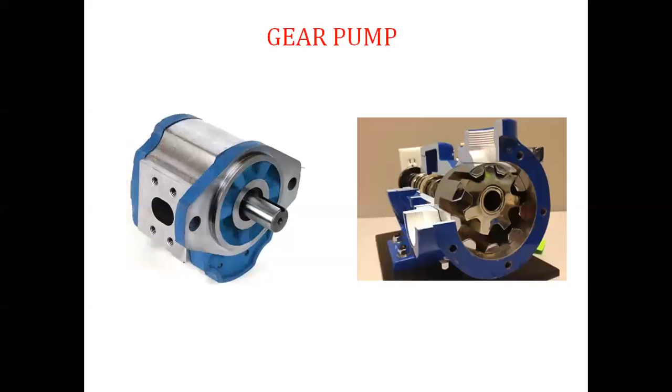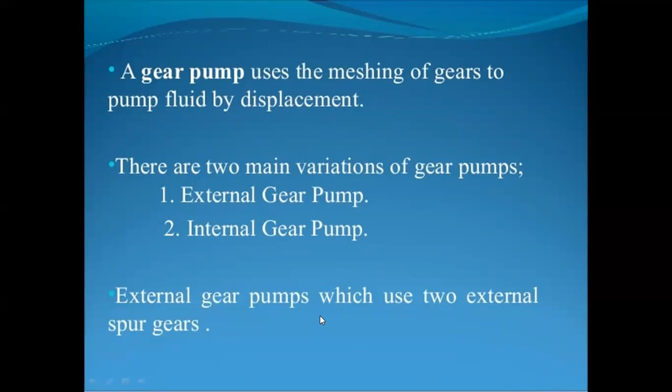A gear pump uses the meshing of gears to pump fluid by displacement. There are two main variations of gear pump: external gear pump and internal gear pump. External gear pumps use two external spur gears. Internal gear pumps use external and internal spur gears.

Gear pumps are positive displacement or fixed displacement, meaning they pump a constant amount of fluid for each revolution. Some gear pumps are designed to function as either a motor or a pump.

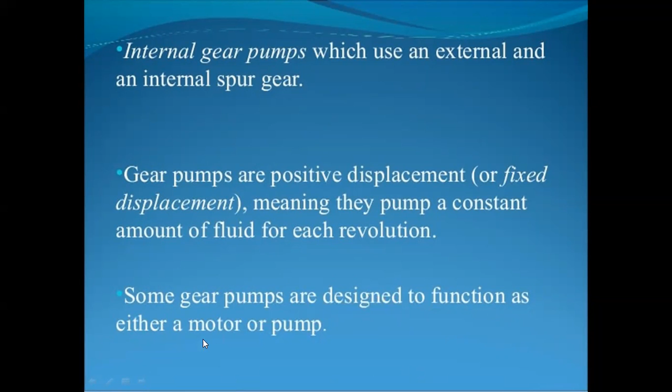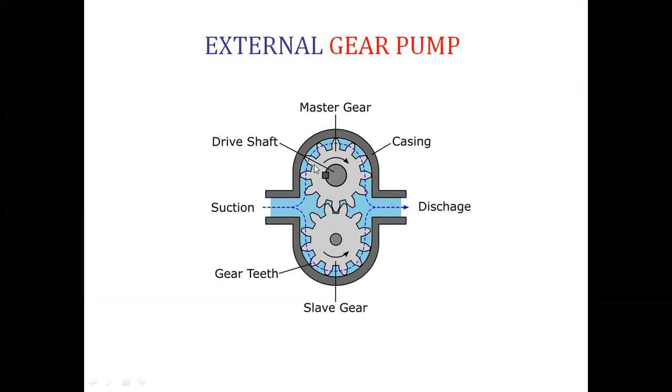External gear pump: master gear, drive shaft, casing, suction, discharge, gear teeth, slave gear. See, this is an external gear pump. Here, two gears are used, external gears. This is the inlet of the liquid and this is the outlet of the liquid. Here, this master gear rotates and drives this gear, like that, in the clockwise direction. This one rotates in the anti-clockwise direction.

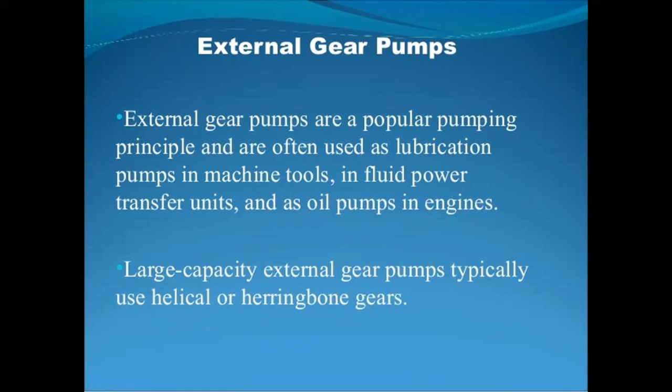External gear pumps are a popular pumping principle and are often used as lubrication pumps in machine tools, in fluid power transfer units, and as oil pumps in engines. Large capacity external gear pumps typically use helical or herringbone gears. Small external gear pumps usually operate at 1750 or 3450 RPM, and larger models operate at speeds up to 640 RPM.

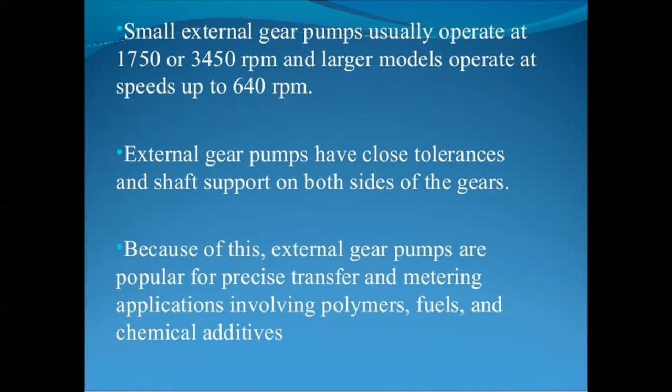External gear pumps have close tolerances and shaft support on both sides of the gears. Because of this, external gear pumps are popular for precise transfer and metering applications involving polymers, fuels, and chemical additives. External gear pumps are similar in pumping action to internal gear pumps, in that two gears come into and out of mesh to produce flow. The external gear pump uses two identical gears rotating against each other.

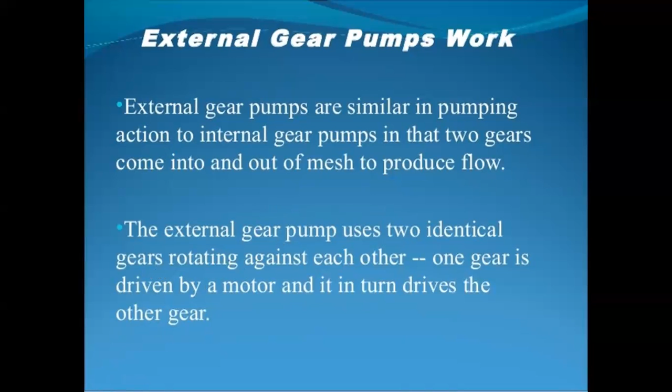One gear is driven by a motor and it in turn drives the other gear. Liquid flows into the cavity and is trapped by the gear teeth as they rotate. Liquid travels around the interior of the casing in the pockets between the teeth and the casing. Finally, the gears force liquid through the outlet port under pressure.

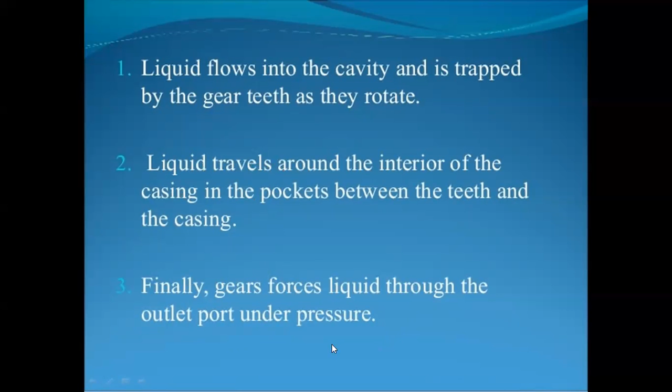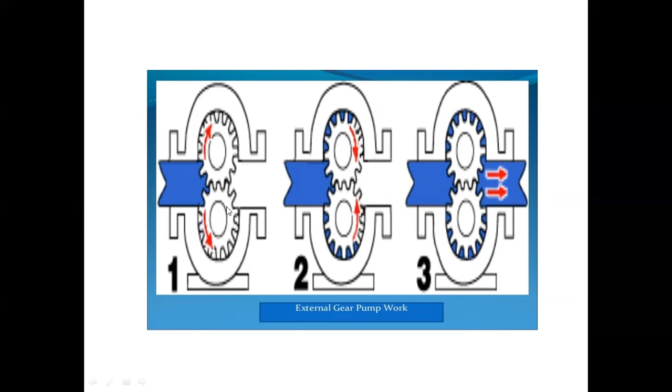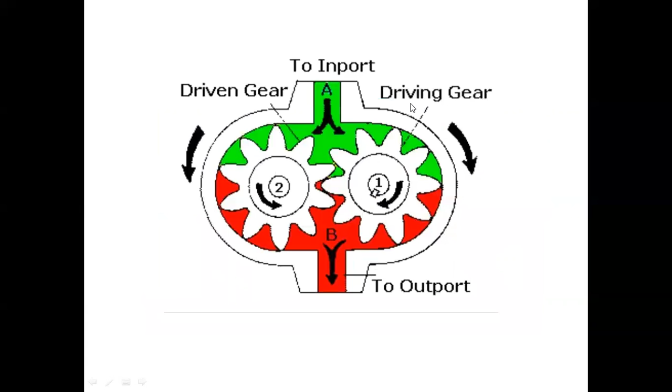See, external gear pump: here the liquid inlets like that. This is a gear. This is the second gear. This is the third gear pump. First gear pump, second gear pump, third gear pump. A gear pair is used here. So liquid inlets from here and outlets from here of the first gear pump. See, input. This is the gear and the outlet of the liquid. This is pressurized liquid. Driven gear.

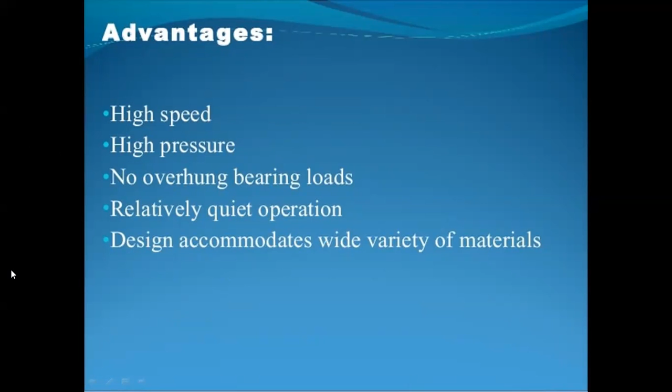Advantages: high speed, high pressure, no overhung bearing load, relatively quiet operation, design accommodates a wide variety of materials. Disadvantages: four bushings in liquid area, no solids allowed, fixed end clearances.

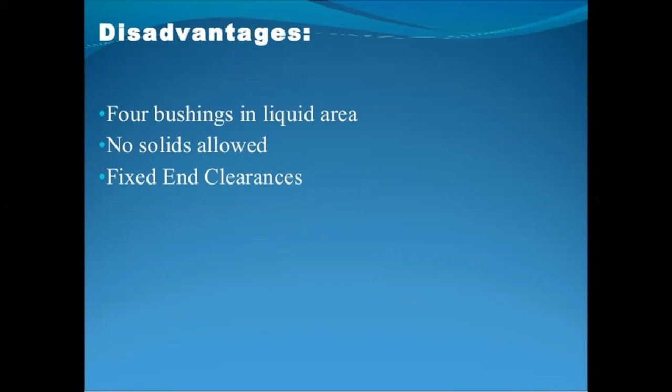Common external gear pump applications include but are not limited to various fuel oils and lube oils, chemical additives and polymer metering, chemical mixing and blending, industrial and mobile hydraulic applications, acids and caustics, and low volume transfer applications. These are the applications.

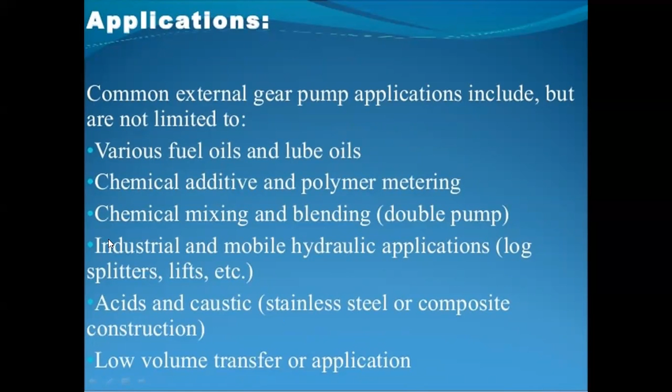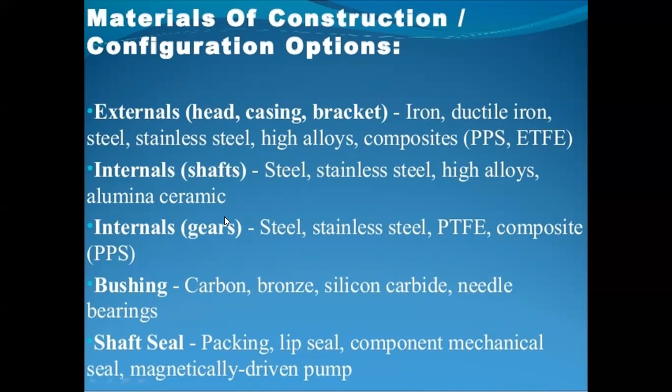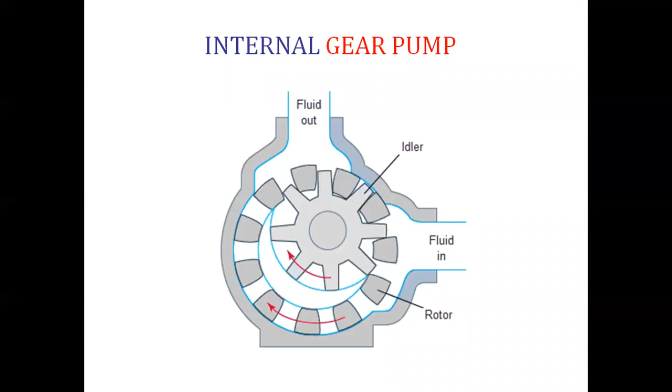Internal gear pumps are exceptionally versatile. While they are often used on thin liquids such as solvents and fuel oil, they excel at efficiently pumping thick liquids such as asphalt, chocolate, and adhesives. The useful viscosity range of an internal gear pump is from 1 cP to over 1,000,000 cP. Centipoise.

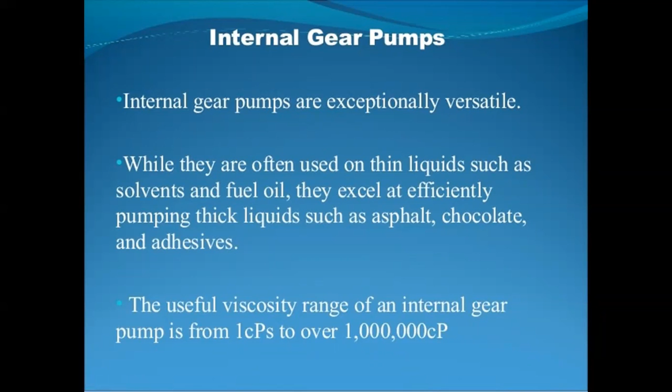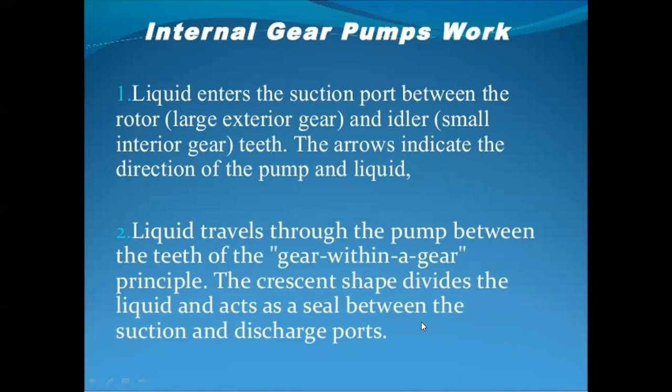Liquid enters the suction port between the rotor and idler. Small interior gear teeth. The arrows indicate the direction of pump and liquid. Liquid travels through the pump between the teeth of the gear-within-a-gear principle. The crescent shape divides the liquid and acts as a seal between the suction and discharge ports. The pump head is now nearly flooded just prior to forcing the liquid out of the discharge port.

Intermeshing gears of the idler and rotor form locked pockets for the liquid, which assures volume control. Rotor and idler teeth mesh completely to form a seal equidistant from the discharge and suction ports. This seal forces the liquid out of the discharge port.

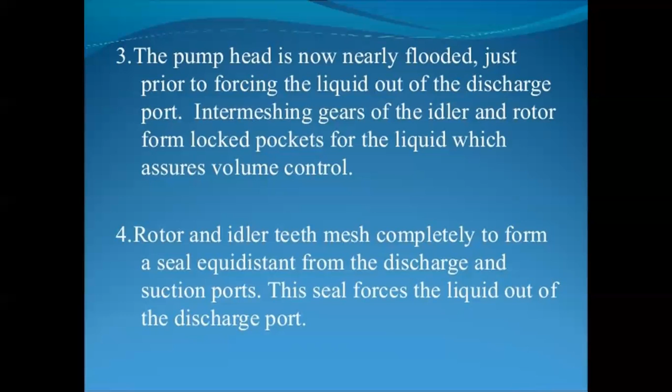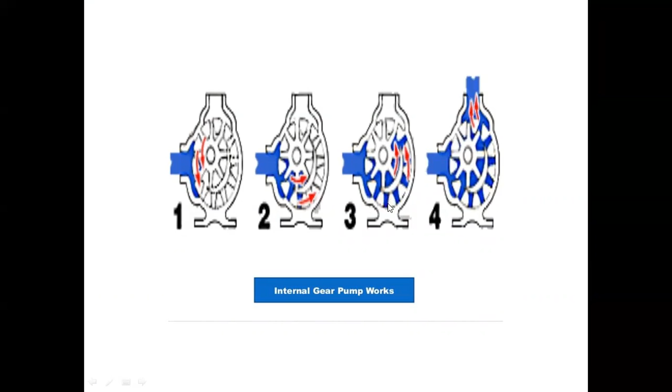Internal gear pump works, see, like that. First, liquid enters. Here, liquid enters like that. After that, this is the complete outlet of the liquid. So inner gear, see, like that.

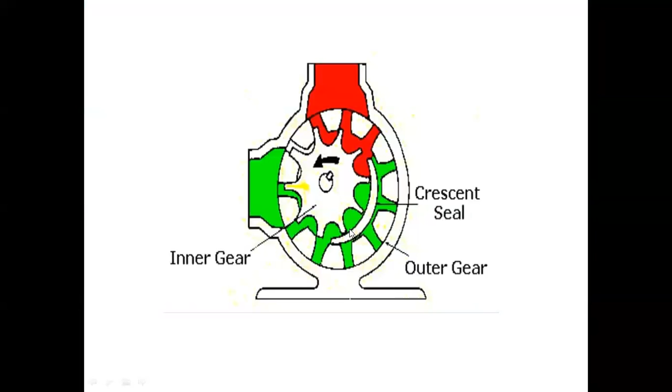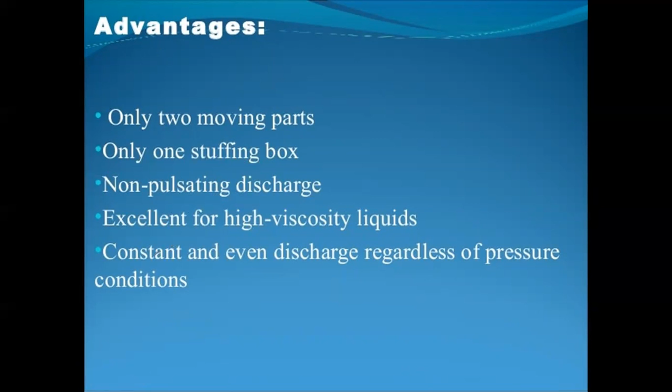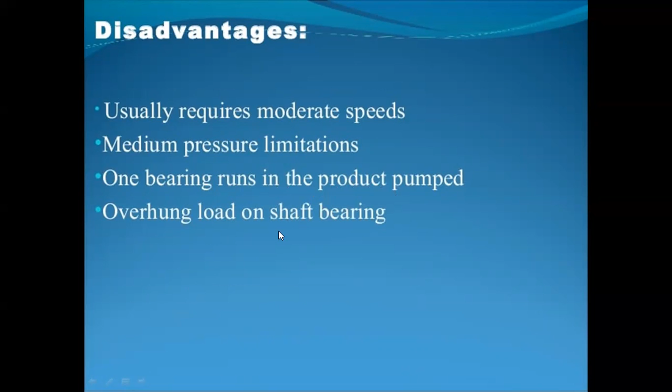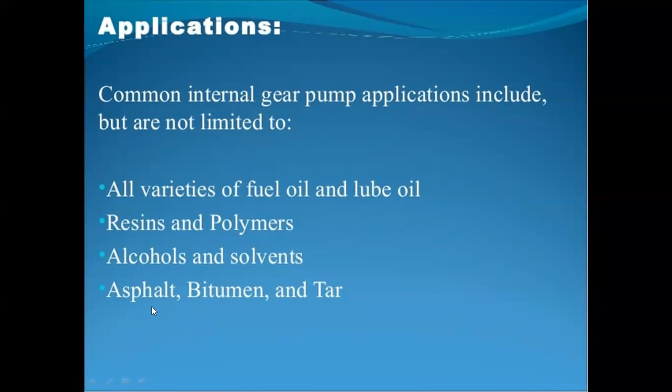Disadvantages of internal gear pump: usually requires moderate speed, medium pressure limitations, one bearing runs in the product pumped, overhung load on the shaft bearing. Common internal gear pump applications include but are not limited to all varieties of fuel oil and lube oil, resins and polymers, alcohols and solvents, asphalt, bitumen, and tar.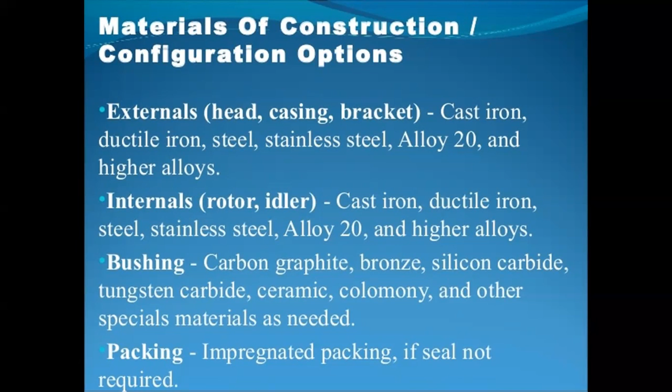Material of construction and configuration options. External head, casing and bracket: cast iron, ductile iron, steel, stainless steel, alloy 20, and higher alloys. Internals, rotor and idler: cast iron, ductile iron, steel, stainless steel, alloy 20 and higher alloys. Bushing: carbon graphite, bronze, silicon carbide, tungsten carbide, ceramic, and other special materials as needed. Packing: impregnated packing if seal not required.

Gear pumps are generally used for petrochemicals: pure or filled bitumen, pitch, diesel oil, crude oil, lube oil. In petrochemicals, we use our gear pump. Chemicals: sodium silicate, acids, plastics, mixed chemicals, isocyanates, paint and ink, resins, adhesives, pulp and paper, acid, soap, black liquor.

Lime, latex, sludge, food, chocolate, cocoa, cocoa butter, sugars, vegetable fats and oils, animal food.

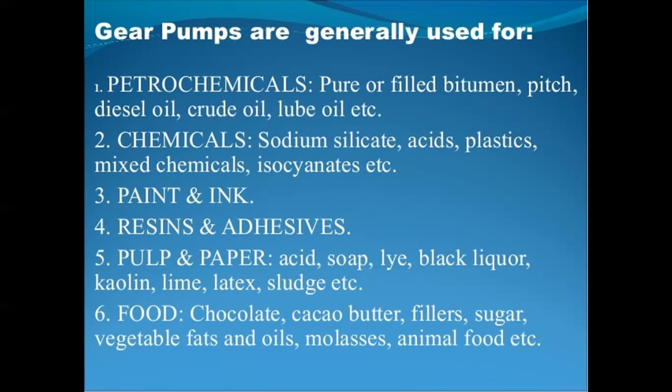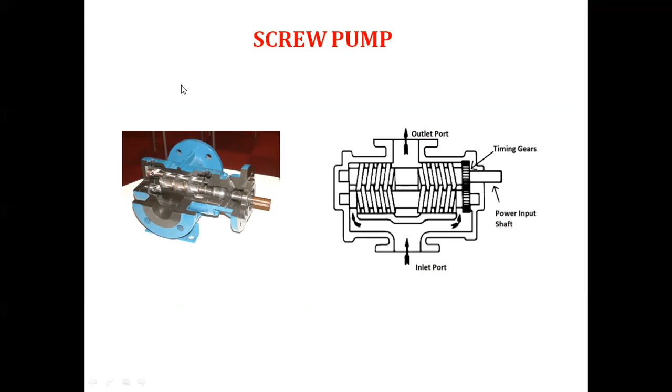This is a screw pump. See here, this is the screw pump, inlet port, and this is the outlet port, timing gear, power input shaft. This is an actual photograph of this screw pump. A screw pump is a positive displacement pump that uses one or several screws to move fluid or solids along the screw axis. In its simplest form, the Archimedes screw pump, a single screw rotates in a cylindrical cavity, thereby moving the material along the screw spindle. This ancient construction is still used in many low-tech applications such as irrigation systems and in agricultural machinery for transporting grain and other solids.

In a screw pump, oil flows between the teeth of the screws, and due to rotation of the screws, it is carried and pressurized. See, single screw pump like that. This is discharge, driving gear, timing gears, driven shaft, top view, twin screw pump.

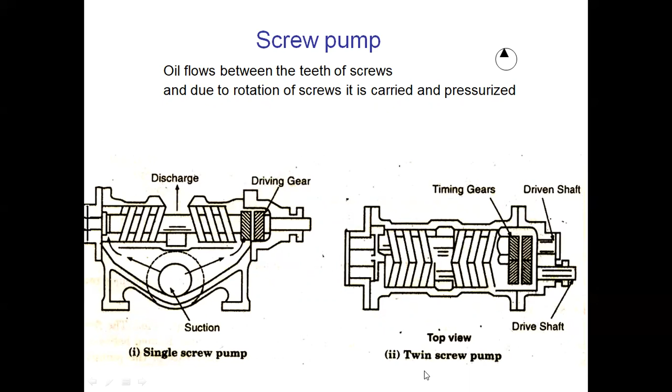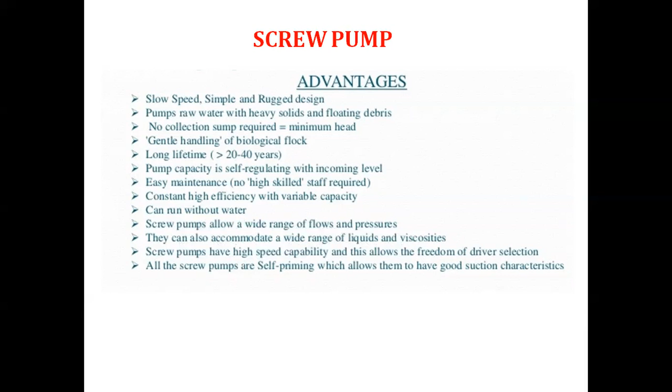Screw pump advantages: slow speed, simple and rugged design, pumps raw water with heavy solids and floating debris, no collection sump required, minimum head, gentle handling of biological floc, long lifetime, pump capacity is self-regulating with incoming level, easy maintenance, constant high efficiency with variable capacity, can run without water. Screw pumps allow a wide range of flows and pressures. They can also accommodate a wide range of liquids and viscosities. Screw pumps have high speed capabilities, and this allows freedom of driver selection. Screw pumps are self-priming, which allows them to have good suction characteristics.

Advantages of screw pump. After the advantages, we are discussing here the disadvantages. Cost of manufacturing is high because of close tolerances and running clearances. Any change in the viscosity of the fluid results in high fluctuation in performance. A screw pump with high pressure capability will require long pumping elements, which increases the overall size of the pump.

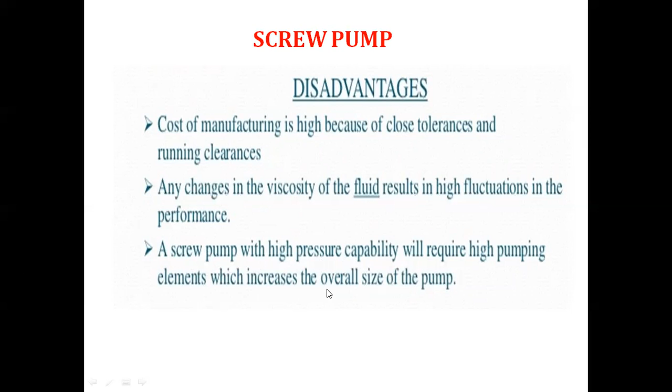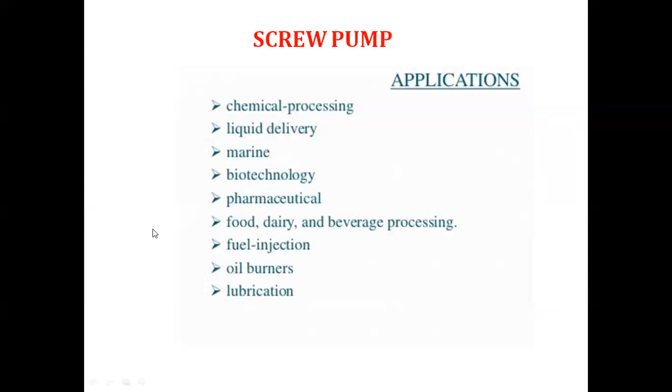Applications of the screw pump: chemical processing, liquid delivery, marine, biotechnology, pharmaceutical, food, dairy, beverage processing, fuel injection, oil burners, lubrication. Assignment: write the advantages and disadvantages of gear and screw pumps.